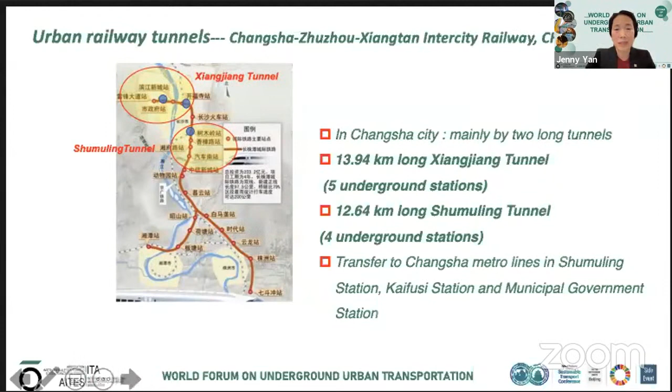Alaskan Way Viaduct Replacement Tunnel in the US and Madrid M30 motorway in Spain, I think they are typical urban road tunnel projects, not only improving traffic conditions in the city center, but also greatly improving the environment on the ground. Randy from the US and Pedro from Spain will share with you the details of these two very interesting projects later.

Many integrated traffic hubs have been built worldwide. Shenzhen Futian Station is one of these comprehensive transport hubs. It's located in the central area of Shenzhen City with the high-speed railway station as the core.

It integrates with 3 metro lines, Line 2, Line 3, and Line 11, and an underground pedestrian area we call the city living room, the bus station, the taxi station, and the supporting commercial facilities. So it's an underground 3-story structure, a very big one. Dr. Zhou Mingliang from China will share with you a similar project in Shenzhen later.

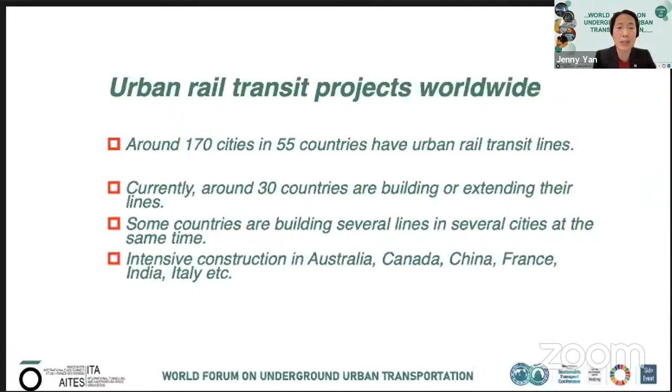In terms of the role of metro systems in sustainable cities, around 170 cities in 55 countries have urban rail transit lines. Currently, around 30 countries are building or extending their lines. Some countries are building several lines in several cities at the same time. Intensive construction is ongoing in Australia, Canada, China, France, India, Italy, etc.

One of the major metro projects ongoing is Grand Paris. There are 4 lines, 200 kilometers, and 68 new stations.

China has built lots of urban rail transit lines over the past decades. By the end of 2020, 7,655 kilometers were built in 45 cities, of which 84% are underground.

This slide shows the operating mileage of metro lines in each city in China. Shanghai, Beijing, Chengdu, and Guangzhou are the top cities with the longest operating mileage of metro lines. Shanghai reaches almost 800 kilometers, Beijing more than 700 kilometers, Chengdu and Guangzhou more than 500 kilometers.

Urban rail transit systems have been playing critical roles in urban transportation in big cities in China. That's why many big cities in China are now building urban rail transit systems intensively.

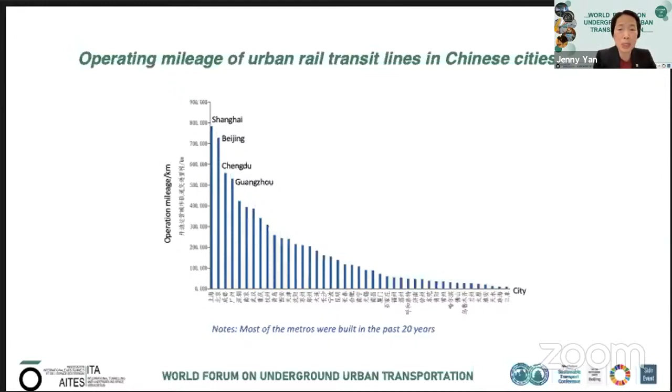It's very interesting that shared bikes are playing an important role in the last 1 kilometer of metro connections. You just scan it with your mobile phone and you can ride to wherever you like. It's very convenient and very clean.

The most popular and efficient use of underground space for big cities, I think, is metro systems, which improve urban transport greatly. Metro systems have become the backbone of urban transport in many big cities. They have large transport capacity, are fast, punctual, safe, and environmentally friendly. They contribute to sustainable and resilient cities.

Metro systems contribute to several UN SDGs, as Olivia mentioned at the beginning, including numbers 3, 7, 8, 9, 11, 12, and 13. They contribute to building inclusive and sustainable cities.

The way forward, I think it's important to integrate deeply urban underground transportation with urban developments. Underground transportation provides a solution to urban challenges, but it needs to be integrated with other modes of transport on the ground to form a cohesive transport system. And it's also important that it's not just about solving urban mobility problems, but also about the economic and social development of cities, and needs to be deeply integrated with urban development.

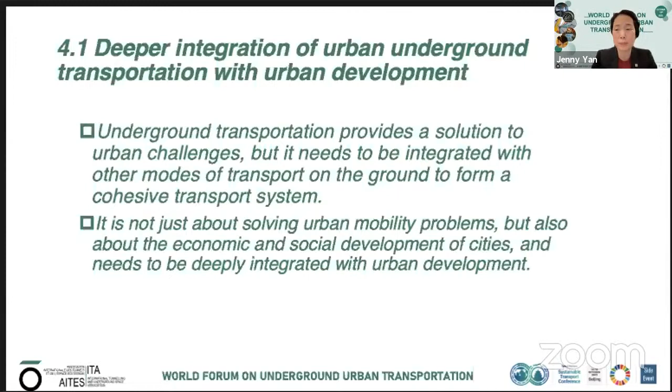Not only is land on ground level limited, but underground space is also very limited and needs to be used very efficiently. So how can we use underground space more efficiently? I think we may use a single tunnel instead of twin tunnels. We may use 2 or even 3 levels in a tunnel instead of 1 level. We may use precise tunnel shapes to avoid wasting space. We may use a multifunctional tunnel to increase underground space utilization, etc. Like the different projects like smart tunnel and other projects, so we can use underground space more efficiently.

Urban underground transportation provides environmentally friendly solutions to cities. But at the same time, construction methods of such projects should be also environmentally friendly, and further countermeasures should be taken, such as less disturbance to the environment, less noise, less vibration, and less dust, and the protection of underground water, and treatment and use of excavating spoil, and use of clean energy for both construction and operation, etc.

I'm convinced that urban underground transportation will play an increasingly important role in sustainable cities. Thank you.

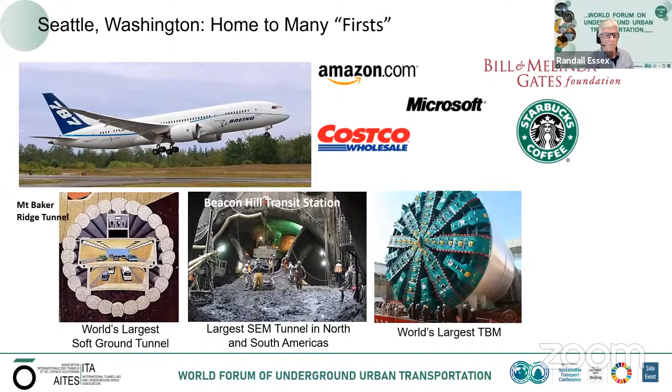But the story really begins in 1989, in Oakland, California during the Loma Prieta earthquake. A Richter of 6.9. It was a terrible issue. I was living in the Oakland Hills at the time. The World Series baseball was going on, and thankfully Oakland was playing San Francisco across the bay, and many people were already home from work watching the baseball when the earthquake struck at about 5:30 in the evening.

This used to be a double-decker freeway. It collapsed. The Cypress Freeway collapsed, crushing a number of vehicles, causing a lot of damage. Flying buttress supports failed terribly, came crashing down and pancaked. That's the upper deck sitting on the lower deck. It was egregious. It was somber.

And as I say, I lived up in the Oakland Hills and we rode out the earthquake, my wife and son and I. And that next morning, I saw the aftermath firsthand, and it was devastating. Remarkably, only 63 people lost their lives because the baseball was going on at the time.

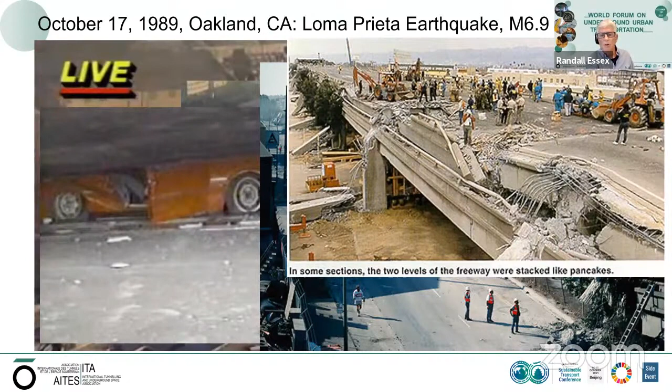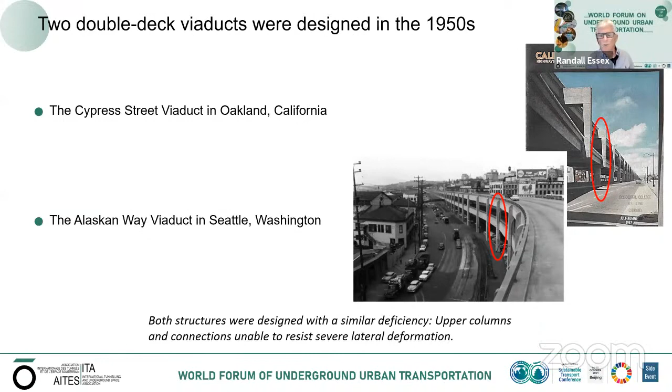Well, there were two double-deck viaducts that were engineered and built in the 1950s. One was the Cypress Freeway Viaduct that I've just described in Oakland, California. The other was the Alaskan Way Viaduct in Seattle, Washington. They may have shared ideas in design, but what they also shared was a similar deficiency: upper columns and connections that were unable to resist severe lateral deformations in the earthquake magnitudes that struck California and then ultimately struck downtown Seattle.

Well, this is a picture of Seattle's central waterfront. Since the 1900s, traffic relief has been a problem in the congested area.

After decades of design and debate going back and forth, a solution was decided upon: two grade separated or elevated highways, one that would pass along an interstate route, Interstate 5, farther inland, and the other, the Alaskan Way Viaduct, would carry State Route 99 along the waterfront.

Both projects were a couplet. They were intended to provide traffic from south to north and north to south without encumbering the city streets, and they were both built in the 50s.

Well, Seattle got their Loma Prieta in 2001. It was called the Nisqually earthquake. It was a 6.8, not a 6.9, but devastating nonetheless. A subduction zone earthquake. It damaged viaduct columns and connections. It caused the settlement of some of the foundations of the viaduct.

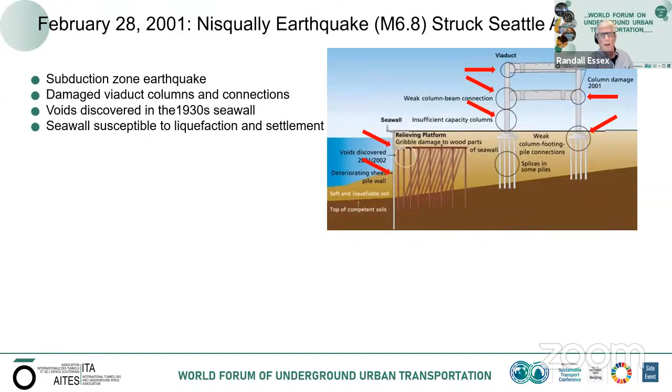They discovered voids in the 1930s seawall that was securing the waterfront area. They determined the seawall was susceptible to liquefaction and settlement in any subsequent event.

Emergency repairs were carried out immediately to strengthen these supports. I call it the reframing of the expression 'full metal jacket,' providing steel reinforcement so that if aftershocks or subsequent earthquakes were to occur, what beset the Cypress Freeway in Oakland would not repeat itself in downtown Seattle.

Well, the timeline of this project was after the Nisqually earthquake there was lots of debate, lots of discussion, lots of interchange with the public about what to do. Do we repair? Do we replace? Do we bore a tunnel? Some even felt no build was an acceptable solution.

Well, thankfully, the governor of Washington State in 2009 declared no more study. We need to move ahead. We're going to select the tunnel option and it's going to go forward.

From 2006 to 2010, I was part of a team that prepared RFPs and issued a design, build, delivery. I'll tell you that a key member of our team was a veteran from the Smart Tunnel project in Kuala Lumpur. So we brought a lot of lessons learned from that project to this project. So carrying lessons learned forward is a very important aspect of our business.

And this was critical here because no one had ever built a tunnel like Smart, and no one had ever built a tunnel like the Alaskan Way Viaduct Replacement Tunnel.

Well, in 2010, Seattle Tunnel Partners, a contractor consisting of a joint venture of two contractors I'll describe later, was selected. They selected Hitachi Zosen to build an earth pressure balance machine of a dimension never seen before, upwards of 2 meters larger diameter than the largest machine ever built before in Shanghai, with 30% more face area.

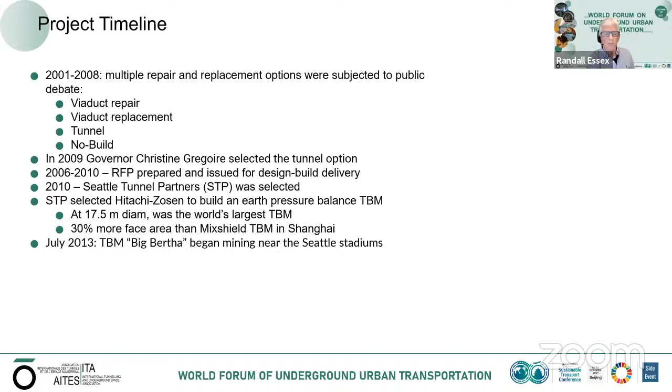The machine was termed Big Bertha after a former mayor in Seattle. In 2013, it began mining near the Seattle sports stadiums on the south and headed north to Seattle's Space Needle. April 2017, the TBM mined into a receiving pit, completing its drive.

In 2019, the viaduct closed to realign the highway configuration so that they could connect into the new tunnel portals just constructed. In 2019, the tunnel was open to vehicles. At that time, the viaduct was removed, and I'll show you pictures of the dramatic transformation of the waterfront. And then tolling

began in November 2019. Some tunnel facts: a 3.2 kilometer drive, a double deck tunnel. This is much larger than SMART. SMART accommodates cars only. This is the first bored TBM tunnel to accommodate double deck truck traffic, thus the need for the much larger diameter.

There's a view of the alignment and plan at the south cut and cover heading northward to the Space Needle. It was mined through glacial soils up to 67 meters of coverage, with 5.3 bars of hydrostatic pressure.

And for those highway engineers, here are some elements of details of the configuration: the lane width, the shoulders, the clearances, the grades, etc. The viaduct was able to accommodate at its maximum about 115,000 cars per day. This double deck tunnel came close. It has a capacity of 85,000 cars per day.

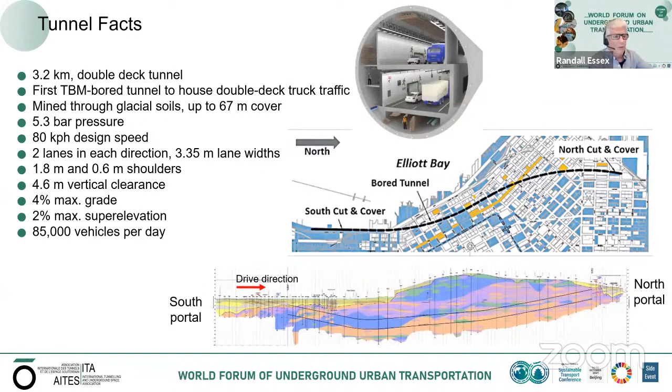Manufacturing the largest TBM in the world was no small task. It was manufactured and assembled in the port of Osaka, Japan, where they had some of the strongest lifting cranes in the world to help assemble the massive components.

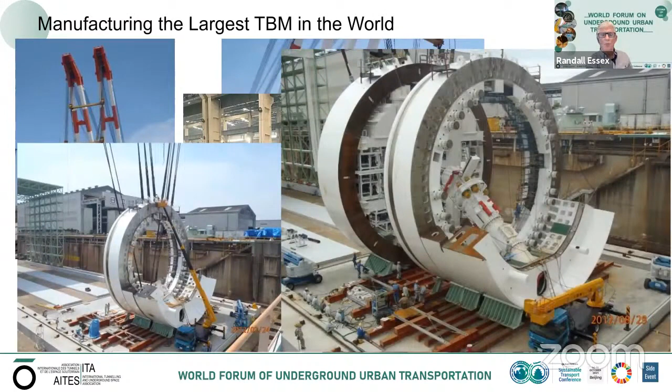That's a screw conveyor on a 17-meter machine, with hardened steel. Here they are assembling pieces, erecting at the docks for the first time. There's the screw conveyor going in and the rear shield. And finally, Big Bertha is ready to bore, but this is in Osaka, Japan.

The project is in Seattle. So the TBM was disassembled, shipped in various pieces on the world's largest cargo ships, and brought to Seattle, where it was reassembled on site.

You can see where the viaduct was removed to provide space for a launching pit. The TBM began its drive directly under the viaduct that would be removed upon completion of the tunnel construction.

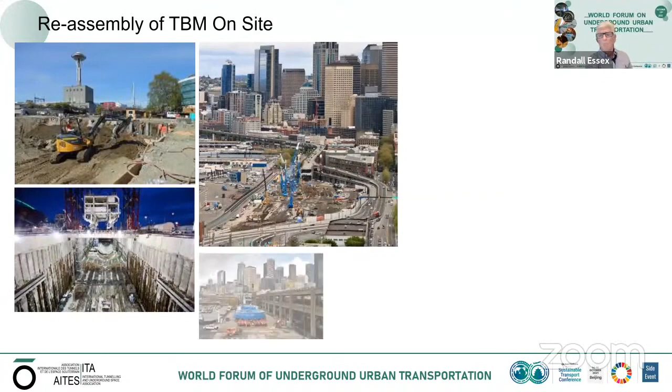Here they're preparing the site. Here's the launch pit, or the launching slot. Here they're bringing pieces of the TBM in from the port. There's the trailing gear assembly. The cutter head is being offloaded.

And then they reassembled it in a pit where those blue cranes are shown in the photograph. Here's the cutter head being lowered into the pit. Here's the TBM and its trailing gear taking shape.

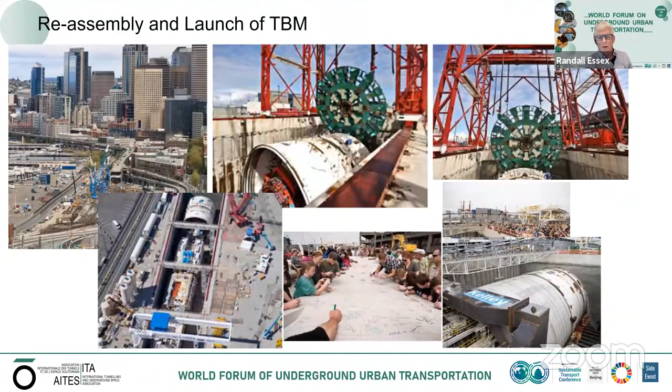The public is a very important element of engaging the public. Seattle is only the 20th largest city in the US, but it's a very community-driven environment, with a lot of engagement, votes, and participation on behalf of the public, even to the point of children and members being able to access the top of the TBM to write good wishes on the machine upon its launch. And here's the slot trench, and you can see how close it is to the port.

And finally, TBM mining begins in 2013. So here's some photographs of some of the tunnel construction. What does a 17.5 meter opening look like?

Here's the south portal. There were two erector arms like this to install the precast concrete segments. They could operate concurrently, independently of one another. There's the bored tunnel.

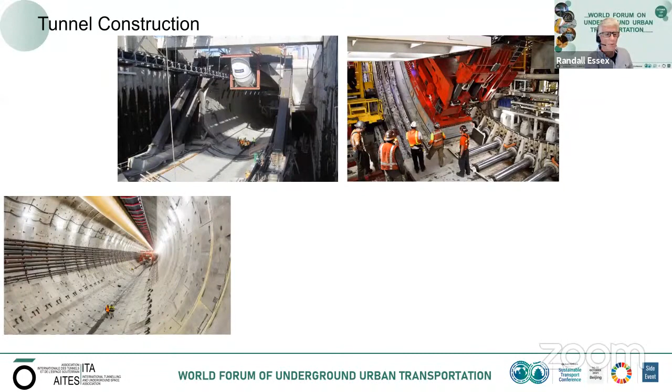The tunnel completed before the inner workings and fixations are installed, the walls, the supports to accommodate double-decker emergency egress passages in the sidewall openings. There they're completing the upper deck lanes, and this is a photograph of the completed lower deck lanes just prior to opening for operation.

Now I'd like to talk about the transformation of Seattle's waterfront. I've told Olivier that this project turned a rusting 75-year-old hulk to a double-decker freeway into Paris's Champs-Élysées. And I don't think it's an exaggeration.

This is a photograph of the images with the viaduct in place. And here it is gone. This is a photograph looking south to some of the stadiums along the waterfront of what the double-decker viaduct and one other elevated highway looked like.

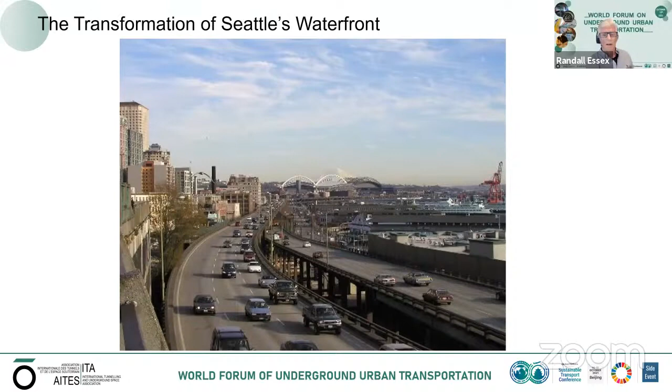And this is what it will look like in the near future. It has become a walking esplanade with access to the water, an opportunity for families and children to play and see the water, for people to view the Puget Sound from downtown and vice versa. That is quite an urban transformation.

It may be unmatched, I don't know, but we find it in the tunneling business: once we do something unique, it becomes a precedent for others to follow. SMART was a precedent for engineering this project. There are many precedents. The Channel Tunnel was a precedent for the subaqueous drive. I believe this will be a precedent for urban renewal, leveraging the benefits of underground space and underground tunnel operation to transport people, goods and services.

On the left is what the viaduct looked like looking north. This is what the portal accesses into the tunnel look like now. This is what it looked like viewed from one of the city streets with the viaduct. And a month and a half later, the viaduct was gone and the viewscape is improved.

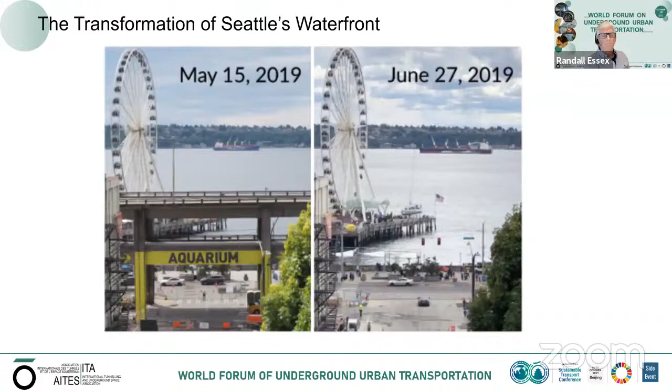Well, landscape architects were engaged and a competition was involved. Again, a lot of public engagement to talk about how they could modify this newly acquired acreage and turn it into living space and communal space for the public to enjoy.

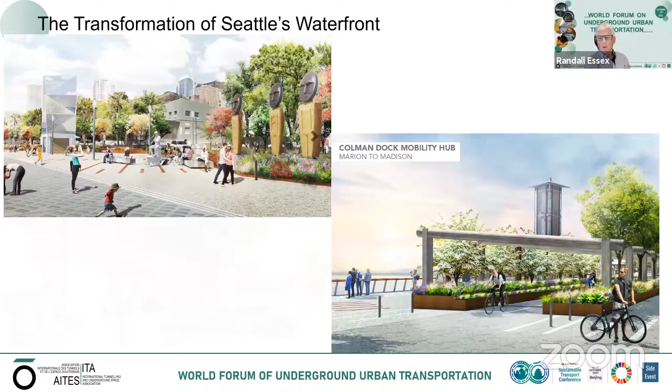We've solved the issue of providing resilient, sustainable transportation for people going through and under the city. Now, what about people who are inhabiting the city, who are working here, who are living here? These images are eventually going to be followed by real-life construction to enhance the experience along the waterfront, the access to the harbor, the access to new recreational facilities looking west to Puget Sound, all arising from one large cylindrical opening underground.

Well, I'd like to offer some acknowledgements. Certainly the Washington State Department of Transportation showed tremendous verve, foresight and forbearance to start on this path and continue despite a number of obstacles during its development.

The Washington State DOT management and engineering consultant team includes Mott MacDonald, WSP, who was known as Parsons Brinckerhoff at the time, Shannon and Wilson, HDR, and EnviroIssues. On the contractor side, the design build contractor was a joint venture of Dragados USA and Tutor Perini, with its designers HNTB, Intecsa, and Hart Crowser. There were also a number of other contractors, Atkinson, Kiewit, and Skanska, who supported other elements of modification of the viaduct to facilitate construction of the tunnel and final reparations to complete the works.

In closing, I'd like to note that a lot of the key innovations and knowledge gained from this project were captured in the Muir Wood Lecture of 2018, presented by Professor Ed Cording, professor emeritus of civil engineering at University of Illinois. The title of Dr. Cording's report is Monitoring and Controlling Ground Behavior at the Source: Recent Applications in Pressurized Tunneling.

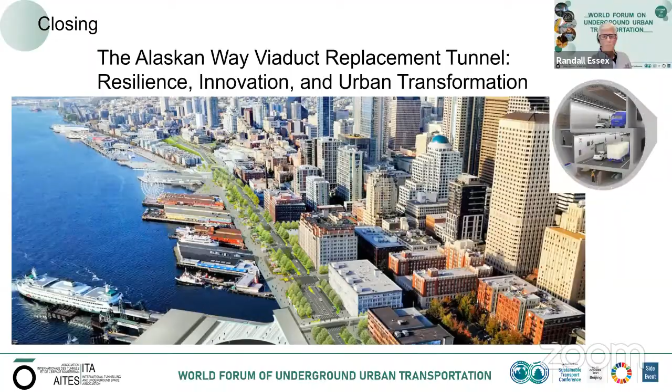We are now going to have, I would say, quite a similar urban transformation, but this one in Madrid with the construction of the M30.

Can you see my screen? Not yet, no, we see your computer. Oh, totally, okay, sorry about it. Hold on. You see it now? Now? Yes. Okay, sorry for the delay, for the inconvenience.

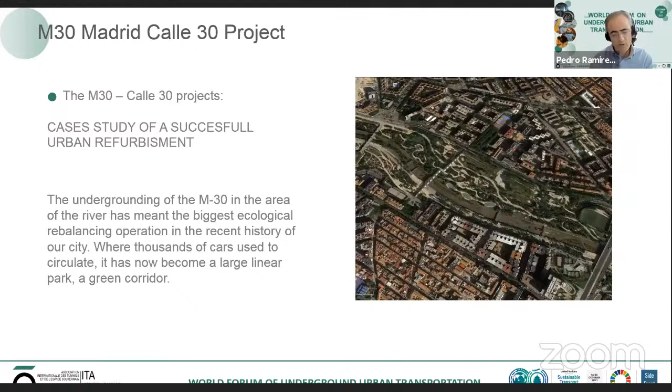In this presentation, I will try to explain a project which is already known sometimes because it takes about nearly 20 years from its beginning, but which is a good example of a case study of how it is possible to improve transport and at the same time recover the surface for leisure use with the smart use of the underground space.

The M30 is the main ring road around Madrid, called Almendra Central because of its shape. In the early century, the M30 ring road, especially the southern part, generated intense traffic congestion, which extended to the eastern part of the city. At the same time, the banks of the Manzanares River became very degraded as a result of the increasing traffic.

That ring road started as an idea in 1929, and its initial construction was completed at the end of the 70s, with the final rings closed in the 1990s. So the Manzanares River and the large green areas, especially at the east, are the main features of the layout. You can see here some images of how the river banks appeared at that age.

The Madrid City Council decided at the early part of the century to undertake a comprehensive reform of the entire perimeter ring road, not just the south area, but especially there because it was very degraded. The main targets were improvement of the M30's functionality, reducing traffic, making it safer and more comfortable, reducing traffic inside the ring itself, eliminating the barrier effect because those roads created a barrier making one side not accessible to the other, and also improving the environmental condition of that area.

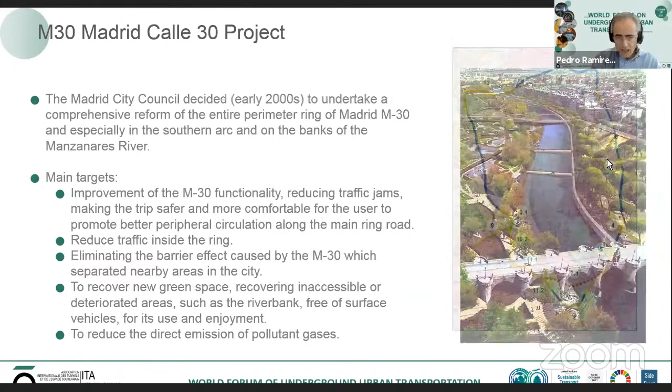So it's safer to go through there instead of on the surface. Because of the efficiency of that, the time savings mean a lot of millions in fuel savings per year, and also a significant reduction in terms of contamination.

This infrastructure is managed by a mixed public-private partnership where 80% of the shares are owned by the Madrid City Council and the rest 20% by a private company, called MSM.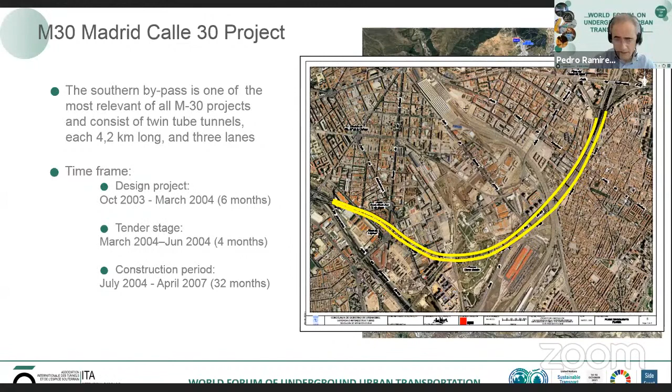This is the time frame for the completion of this specific section of the whole refurbishment of the ring, concentrated at the south, called the southern bypass, which was completed in only 4 years.

And the cross section is a bit different because there are twin tunnels, with a more compact approach, as Jenny has said, because the twin tunnels allow for the creation of 3 lanes, 3.5 meters wide, with shoulders, and an emergency vehicle lane underneath the slab.

The lining is 60 centimeters and the ventilation is pure transverse. That means the outer diameter required was about 15.2 meters, obviously significantly smaller than the Bertha that Randy explained. But we have to consider that we are talking about nearly 7 years before.

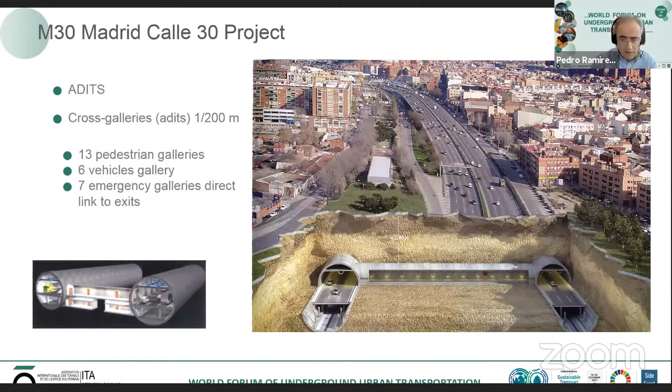This project was also completed with galleries according to regulation in terms of safety and any other big underground infrastructure, like the ventilation shaft to deal with the air.

The alignment is similar to the Alaskan Way, it's a bit longer with a cover of about 60 to 70 meters to the axis of the tunnel, and crosses the tertiary deposit with quaternary on top.

For the completion of this project, 2 TBMs were manufactured. At those days, this was a world record with more than 15 meters diameter, manufactured in a very short time, one by Mitsubishi and this one by Herrenknecht.

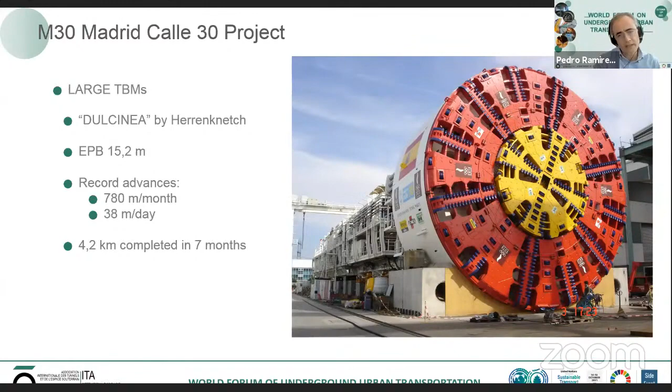Just to give an idea how quickly this type of action can be performed: nearly almost 800 meters per month could be completed. So that means it would be possible to complete 4.2 kilometers in just 7 months.

Another point to underline is that for these pure mine tunnels, it is necessary to prepare launching shafts for the assembling of the TBM at the entrances and exits.

You can see here how, with this massive diameter, it's like a mobile industry moving up to between 30 to 40 meters per day.

Another issue to consider in any urban project is how to deal with the potential effects on existing infrastructures, buildings, and any other structures.

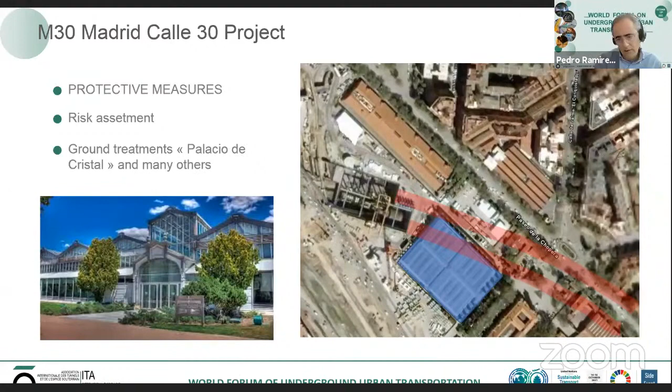In this example, you can see how this is possible to analyze with many instruments and tools that are in our hands now.

In this case, for example, being so narrow, the space between the twin tunnels and this building to be protected was analyzed, with slab and grouting used to protect it.

Just very quickly, to comment on this technique that has been very useful in Madrid because of the nature of the soils being overconsolidated, like in London, for example.

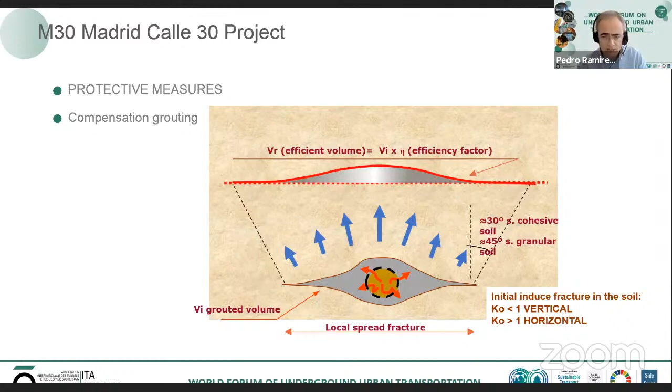This is not feasible everywhere, but by using compensation grouting, which was tested in Madrid also with very good results, it could be feasible to act concurrently to control the subsidence created by these tunnels and to mitigate the risks in the surrounding structures.

Any other issue to consider in any urban tunnel is the control in terms of installing devices and references for monitoring, to check in a continuous process how our predictions compare to reality.

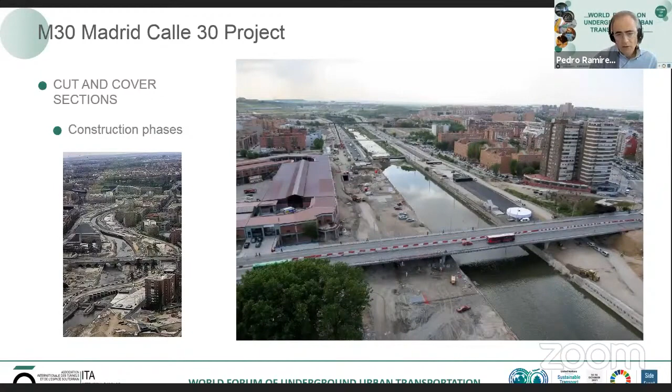There is another part of this project, not just the underground tunnel, but the cut and cover section, which are more dramatic in terms of impact during that time.

But it was considered worthy to decide to concentrate all the work in the shortest time possible, in order to complete and put it into service in the minimum time possible.

This is an example of how other innovative solutions were performed. For instance, to deal with an existing very old bridge, we used jacks, micropiles, and treatment to create the current situation, which is how it appears nowadays.

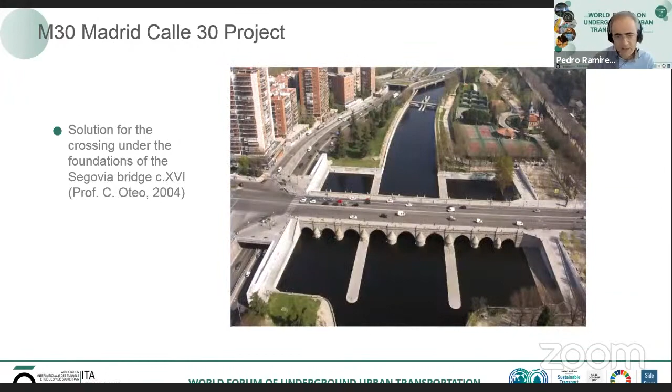At the end of 2007, the infrastructure was completed and put into service. But what I'd like to remark is another issue in the owner's mind: how to improve the environmental and sustainable condition of those margins, in the second half of the project. So in total we're talking about 8 years roughly, a big project to improve the conditions once the tunnels were covered underneath.

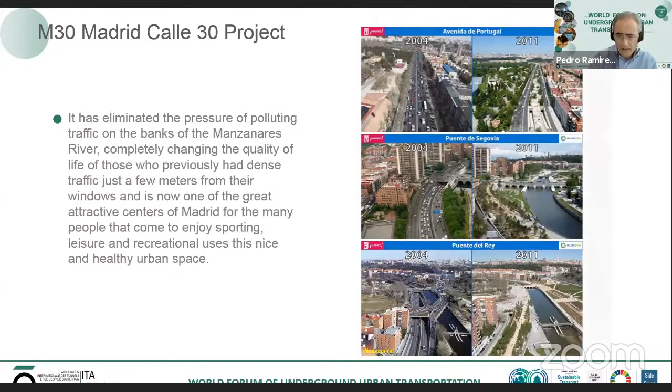This is the aspect it has nowadays. This project has been recognized for its benefits: reduction of contamination, creating a nice landscape, converting it into one of the most interesting touristic areas to visit.

For the future, to summarize, the idea is something similar in the north: to cover the very old railway, which is the second in importance in Madrid. The idea is not exactly to go underground, since it's already upgraded, but to create another space on top for environmental benefits and uses for the people.

So the main lessons learned: tunneling, resources, and experience make it possible to upgrade urban roads where they become inefficient. Large-scale construction can be carried out in a relatively short period of time, depending on conditions and other issues. Public-private partnership financing could be maybe the only way in Europe, or at least as far as we know, to make this feasible in terms of economics and finance.

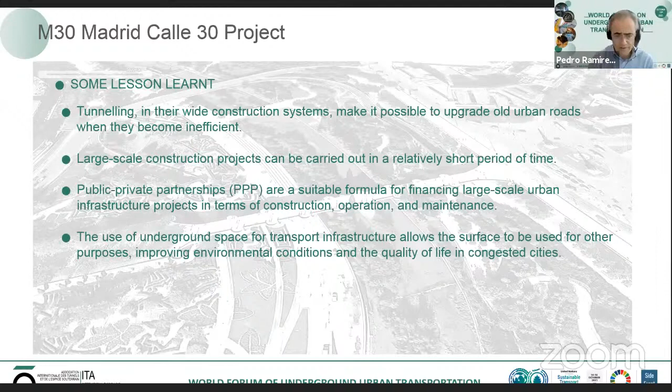The smart use of undergrounds, as Jenny said at the beginning, and the overall cost of these structures should be analyzed considering all the benefits, not just the direct ones, but in a global manner.

It's very difficult for me to summarize all the people involved in this, but I want to mention that it was like a miracle because everyone was perfectly coordinated and motivated, and it was feasible to make this a reality. Thank you for your attention.

Pedro, can you stop sharing? I'll try to. So sorry. Yeah. No, nearly. Sorry. Okay, Dr. Zhou, the floor is yours. Yes, okay, I'll share my screen. It's okay. Yes, perfect, okay.

Thank you very much, I'm very glad to share my experience. Hello everyone, good morning, good afternoon, and good night. Today I want to share the construction of an integrated rail transit hub to promote urban sustainable development.

With the increase of population and the enhancement of the retention effect in big cities, we can make full use of rail transit to connect underground space, reduce interference to ground transportation, and strengthen connections between regions in the process of urban renewal. Relying on the construction of transportation hubs, the land surrounding urban rail transit should be developed as a whole, and a regional coordinated development mode of rail city should be established to drive sustainable economic development of the whole district and improve the image of urban regions.

Here I want to talk about two parts: one is about the whole project. The Shenzhen Chegongmiao Integrated Traffic Hub project is a beneficial attempt and a successful example of urban sustainable development construction, and has good reference value for future similar projects.

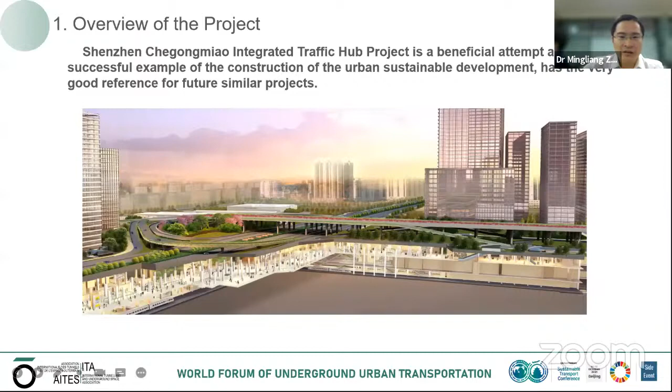Here is detailed information about this area, Shenzhen Chegongmiao area. It's located at the southwest corner of the intersection of Shennan Avenue and Xiangmihu Road. Two big avenues meet here. The width of Shennan Avenue is 80 meters, and it's not easy to connect to the plots on both sides.

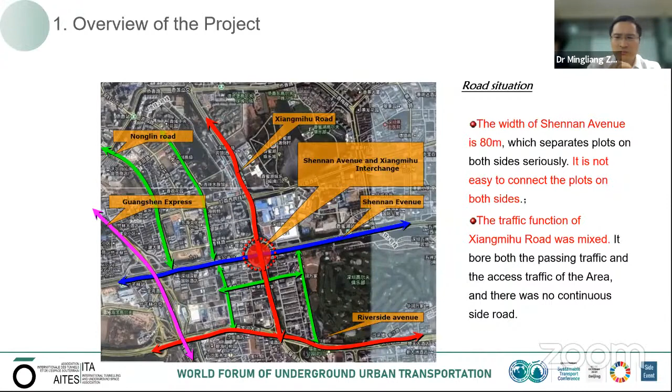The traffic function of Xiangmihu Road was mixed, and the traffic volume of urban trunk roads in this area was large. Here are the figures in the map, divided by urban trunk roads, where the connection was not easy. Here, the turn-left function is also mixed.

Second part, we analyze the demand for this area's development. After detailed analysis, we think we must resolve four aspects for this area: one, transportation must be convenient; second, transfer must be convenient for passengers; third, the function integration; and the last, the environment must be comfortable.

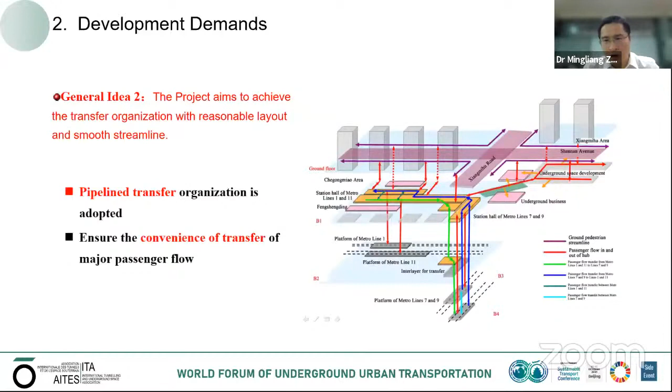General idea 3 is taking advantage of the construction opportunity of subway node stations. The underground public functional space should be developed, land use functions should be combined, and 3-dimensional land development should be advocated. Here we made a detailed analysis for this land.

General idea 4 is about connecting subway, bus, and walking for passengers together. Here are the figures about the rail transit passenger flow of Chegongmiao Hub.

The core development goals of Chegongmiao Junction Station and its surrounding area are mainly reflected in the following aspects: one, contribute to the public; second, regional value; third, urban development.

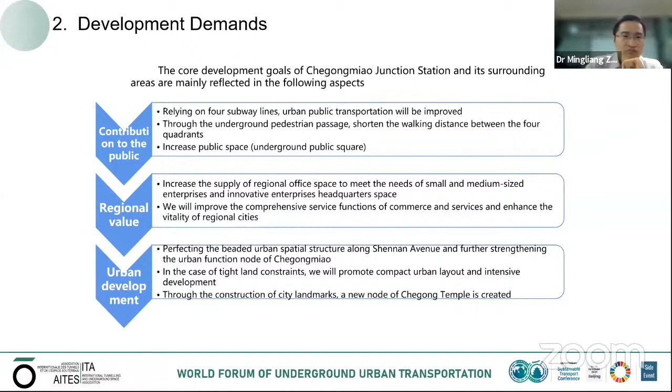Part 3, the key points of the project. Here is research on the metro network. The construction plan phase 3 includes metro lines 7, 9, and 11, three lines here. Chegongmiao should be more closely connected with surrounding intersections through the construction of rail transit.

We want to make the transfer station into one station for 4 lines. Before our research, they sited 2 transfer stations in Zhuzilin and Chegongmiao.

But after our research, we set 1 combined transfer station. For 4 lines, the station is set in Chegongmiao, realizing convenient exchange of passenger flow in all directions and reaching all districts of the city through 1 transfer. This picture shows all directions, all lines, transferring at 1 station.

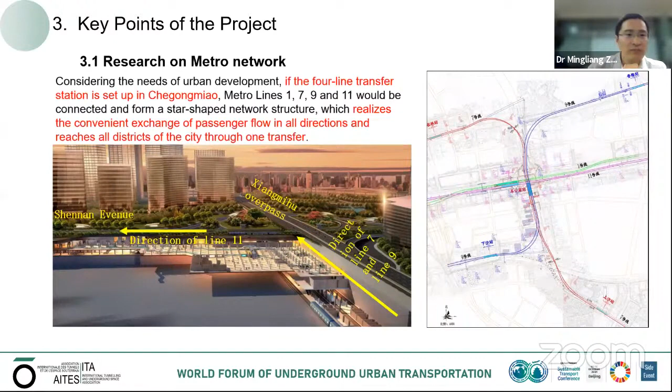The second part is about research on the road traffic system. For the Chegongmiao area, before we constructed the metro system, the road traffic was mixed. We want to improve traffic in all directions in this area.

The transformation goals of the Xiangmihu interchange are to improve the stream function, and for the Chegongmiao interchange, to achieve faster connection. The picture on the left shows that before the change, the turn-left function required a long distance to turn left here.

This picture shows we demolished part of this area and built a new part for this interchange. We also had to consider the walking system.

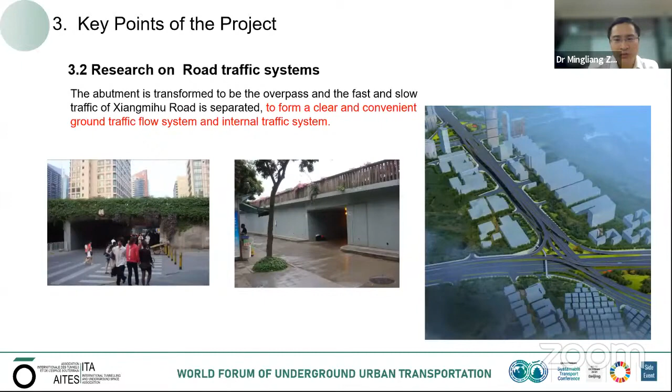We aimed to form a clear and convenient ground traffic flow system and internal traffic system. In the picture, we show that people can go to the other side through our new part. Here is the old one and the new one we changed, especially in the left part, in the Chegongmiao area.

The third point is about the intensive use of space. It has 5 floors underground and 52 floors above ground, with a floor area of 150,000 square meters.

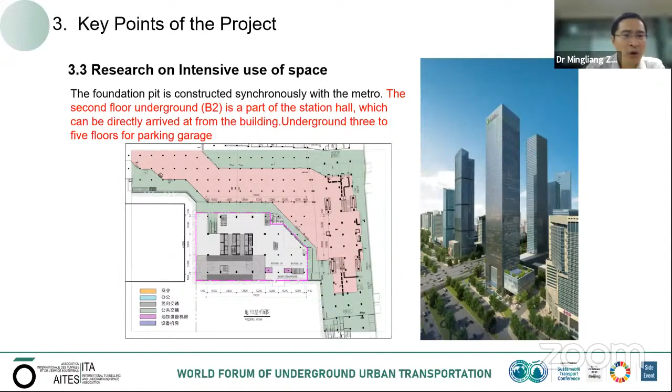The second floor underground is part of the station hall, which can be directly accessed from the building. Underground floors 3 to 5 are for the parking garage. With the planning and reconstruction of the Westland, we stress the connected underground space.

In these two pictures, we show the different functions for this area: commercial, museum, education, schools, and residential. Different functions, different parts.

The space under the bridge is developed, and the commercial space of the station is integrated, connected with the surrounding plots through the underground street passage. Here we make full use of the space under the bridge.

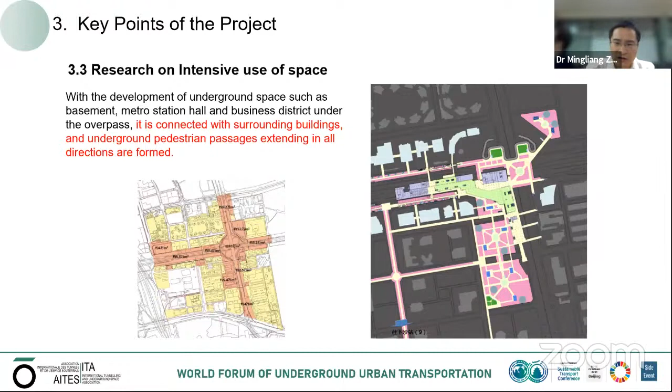And it's connected with surrounding buildings also. Underground pedestrian passages extending in all directions are formed. After we finish this project, people in this area can go through from one side to another, in all directions they can walk, they can reach different parts.

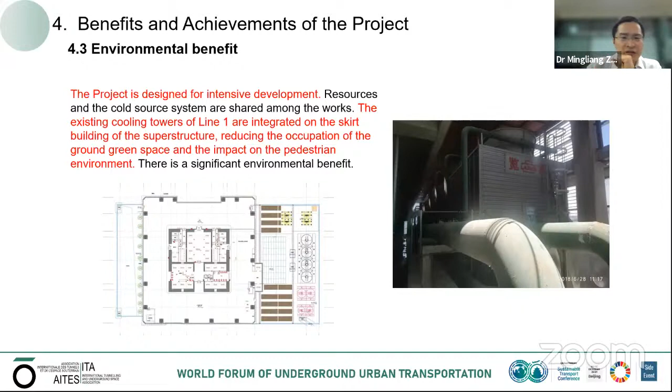The third part is environmental benefit. We also consider the environment of this area. This project is designed for intensive development. The existing cooling tower of Line 1 is integrated on the skirt building of the superstructure, reducing the occupation of ground green space and the impact on the pedestrian environment. This is a significant environmental benefit.

And the social benefit: with the opening of the project, the traffic in this area has been greatly improved. For the older city, we think with the new function of this part, the reconstruction in the Tairan area for this project on the south side consists of 760,000 square meters of construction works, including 50,000 square meters of underground space.

Actually, after we finish this project, we conclude that this experience can be used in many parts, including other areas of Shenzhen, including the 3 or 4 line hubs. And we think if we build public transit with this mode, the life of people in the city will become better and better.

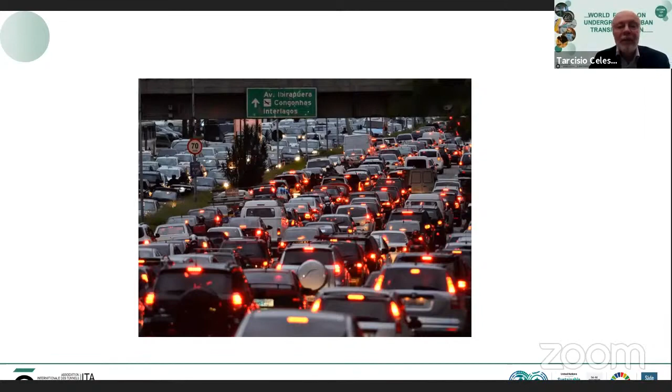Maybe I would not be here, I don't know, if it were not for the metro contribution. This is what our city looks like every evening. It's not different from some of the mega cities around the world. A lot of demand for cars, and this is the traffic jam which we see almost every evening in São Paulo.

There has been some research, and I call attention to this thesis by Silva, 2012, which brought us very interesting data on the contribution of the São Paulo Metro for decreasing air pollution and for contributing to the health of people.

I call attention to this table from that thesis, which shows the average PM10, which is the content of particulate matter smaller than 10 microns, very harmful for breathing. The concentration in the air on a regular day in São Paulo is around 41 micrograms per cubic meter. Let's take a rough number of about 50 micrograms per cubic meter.

In this research, they were able to take the influence of the metro by measuring this number with very accurate methods, which I will not go through in my presentation, on the day when the metro was on strike. So instead of people moving by metro, people would have to move by cars and so on.

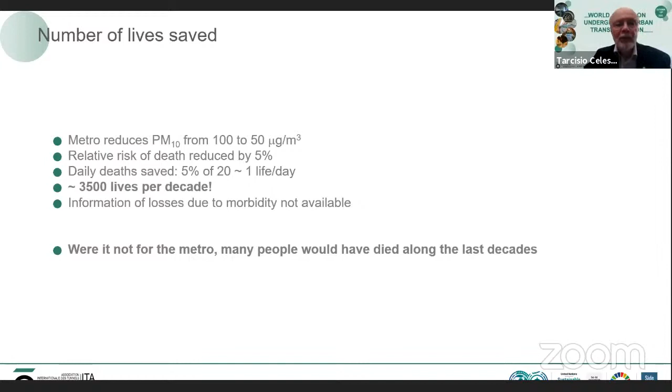As I said, some people are here because of the metro system. I don't know if I am here because of that, but some people would have died. So these are real numbers which show very clearly what underground transportation infrastructure can do for United Nations goal number 3.

Quantitative benefits of São Paulo Metro, summarized in their yearly report, show that the metro system nowadays saves more than 400 million liters of fuel consumption, with all the consequences with respect to greenhouse gas emissions. It's not only the money saved, but a lot of good consequences.

1 billion man-hours of shorter trips, which means a lot for social benefit, and around $700 million in savings in vehicle operational costs. That's quite significant when we think of the social and economic benefits of even such a limited metro system.

When we think about metro, we could say any kind of rail transportation system can bring these benefits, but I would say not necessarily—underground infrastructure is much more effective. If we think of elevated rail infrastructure, is it good enough? With respect to air pollution decrease, yes. With respect to energy savings, not as much, as I'm going to show with an example. With respect to time reduction of trips, it's not as effective yet.

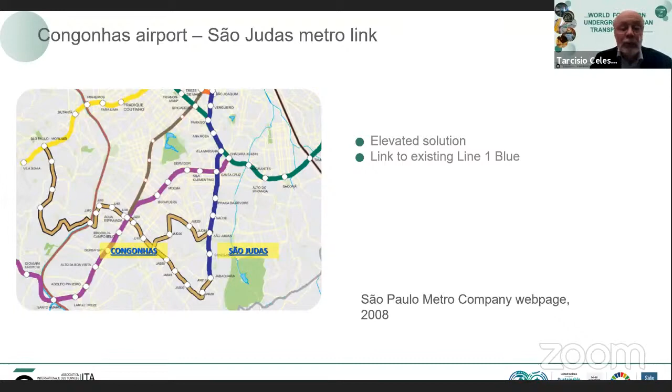Because of that, in 2008, the São Paulo Metro Company announced the link between the São Judas station—along the north-south line of the São Paulo Metro, the very first line constructed in the mid-70s—and the airport, at a distance of about 2,000 meters from the terminal. The São Paulo Metro Company announced construction of an elevated link between São Judas station and the airport, and this elevated link has a very long path because it just goes along the avenues. It doesn't go straight as an underground infrastructure could go.

Let's see, with numbers again, what the consequences of this are. The length: 3.7 kilometers elevated, 2.2 kilometers underground, so 1.5 kilometers more with the elevated solution. This link was predicted to serve 16,000 passengers per day with a headway of 2 minutes between trains, so the total number of daily trips would be 1,140. Additional travel distance, elevated minus underground, would be 1,710 kilometers per day, or 624,000 kilometers per year.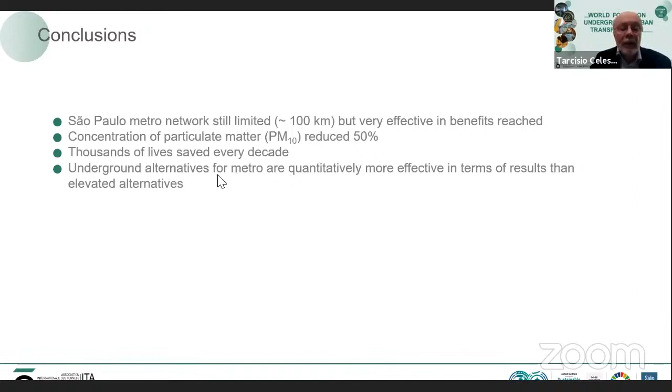But it's not only the metro—the highest benefit comes from the underground alternative for metro, which we have shown is quantitatively much more effective in terms of results than the elevated alternatives. Thank you very much.

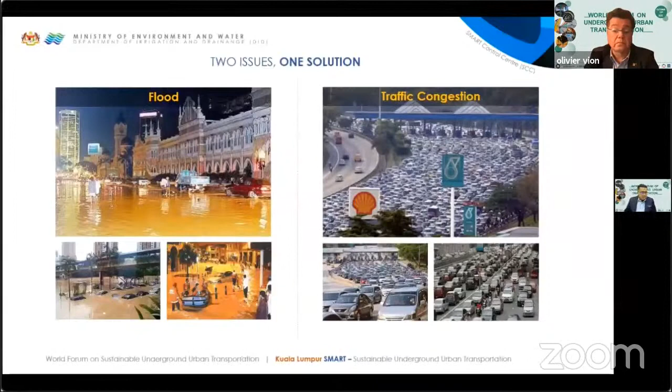Besides that, Kuala Lumpur is also getting busier each year, which is good for prosperity. But Kuala Lumpur is getting more and more congested. Something needs to be done to ease the situation.

Initially, the idea of having Smart Tunnel was actually to build a stormwater tunnel to divert water from upstream and bypass Kuala Lumpur. However, our previous Prime Minister suggested that we include more purposes for the tunnel to bring more value to it. That's when we had the road tunnel included.

So as you can see here, basically SMART is short for Stormwater Management and Road Tunnel. And as we all know, this tunnel is actually serving two purposes: one is to mitigate flood, and also to relieve traffic congestion.

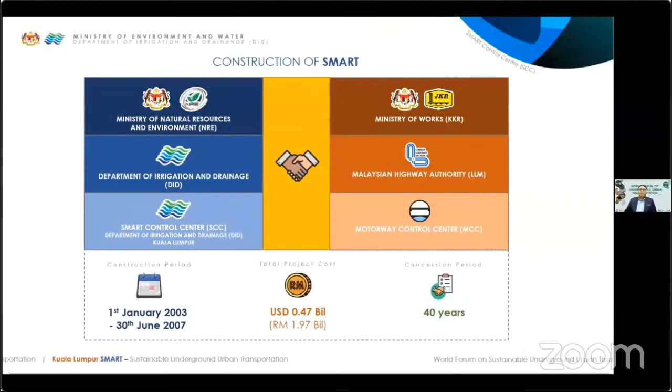With the completion of the tunnel on the 30th of June 2007, to serve this dual function we have two offices: Smart Control Center, which is one of the offices under Department of Irrigation and Drainage, and also Motorway Control Center, which is a private entity that controls the traffic for the road tunnel.

I just want to share with you some of the structures and machines that have been used for the construction of this tunnel. This is one of two tunnel boring machines that have been used. As you can see in the slides, the tunnel diameter is actually 12.8 meters, and it is the largest in Southeast Asia and second largest in Asia.

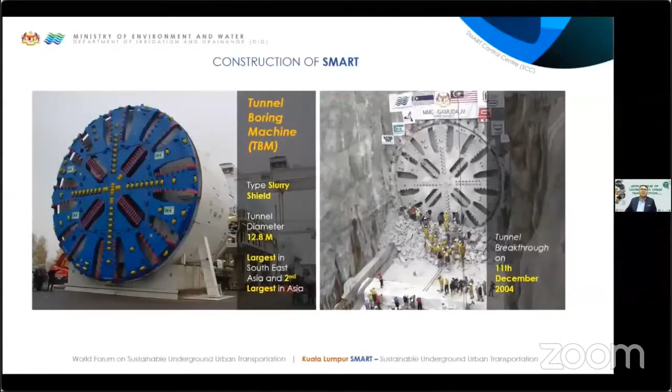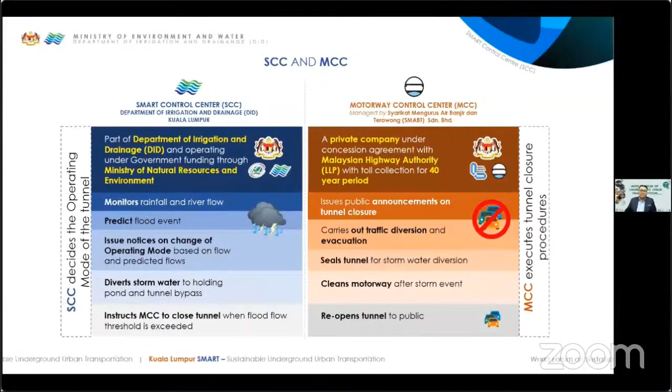So we are talking about sustainability. The main ingredient in sustainability is actually the effectiveness. I will try to share with you how we are doing it. We have actually two operational modes.

By having 70 cumecs of water from Sungai Ampang and also upstream of Sungai Klang, if it is below 70 cumecs, we are not activating any modes at that time. So the tunnel is not operating, and the traffic and road tunnel operate just as usual. But when the water flow is more than 70 cumecs, it brings a risk to Kuala Lumpur, creating higher chances of flood.

So at that time, we will activate mode 2, and this water will flow to our detention and attenuation pond, and the water will also flow through our tunnel. But yet and still, by having the gates between the traffic and road tunnel, the traffic still can operate as usual.

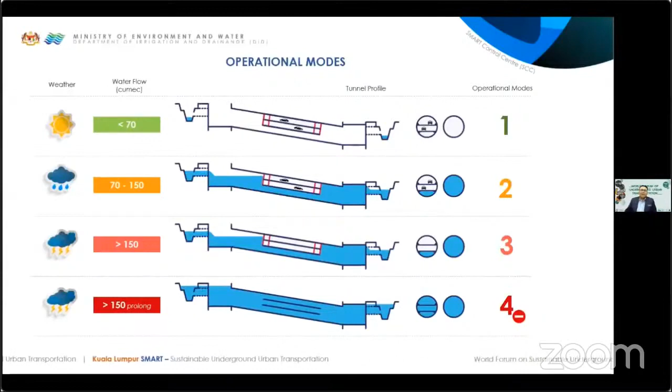So that's where we have to open the gates of the road tunnel and allow the water to flow through it. To make it easier for us to understand more from the operation of these modes, I also prepared some videos to show how the operation of the modes works. So let's have a view of this, please.

So this is for the first mode, and then the mode 2.

Mode 2 is actually utilized for reducing the flood risk for Kuala Lumpur.

So for mode 3, we start evacuating the tunnel, the road tunnel.

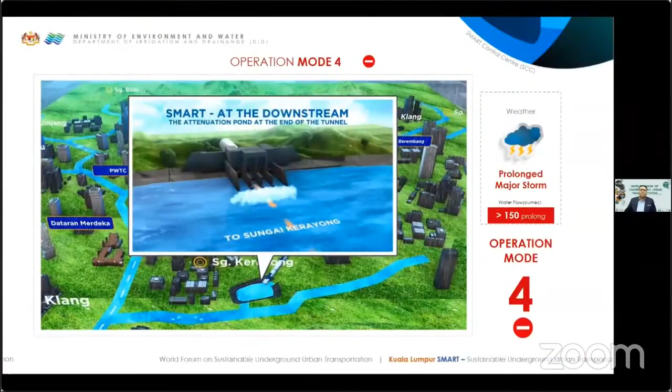So now we are going to talk about the effectiveness of the implementation of all of these modes. Looking at the operation mode, I just want to share with you the trend.

So we try our best to optimize the traffic usage in the road tunnel. Basically, by having this type of operation, we can see that the road tunnel is actually being used only several times within these 14 years.

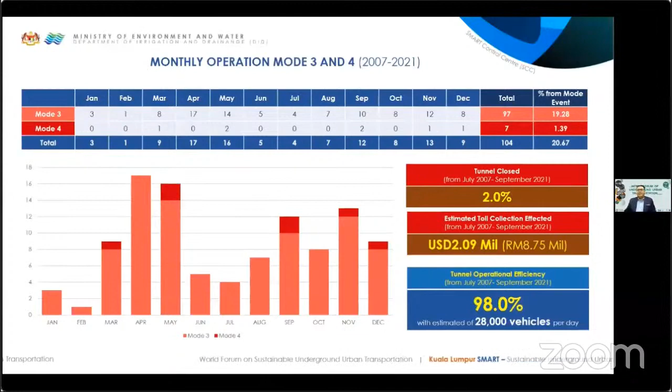So as a conclusion, SMART has been operating flawlessly at its full function, but also by its design. These roles are made possible through a comprehensive standard operating procedure and a successful collaboration for operation between government agency, which is us in SMART Control Centre (SCC), and also the Motorway Control Center.

which is run by a private entity. Within these 14 years of operation, I believe that SMART is a testimony that extraordinary engineering could be made possible. We've done it. How about you?

So with that conclusion, I believe I have to end my presentation. But before that,